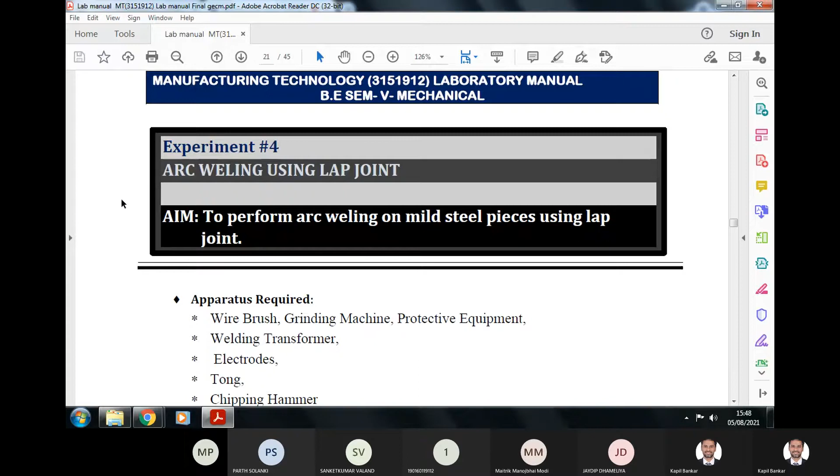A laboratory session of a manufacturing technology subject. This is our fourth laboratory, and today I'm going to discuss practical number 4, that is arc welding using lap joint. The aim of this practical is to perform arc welding on mild steel pieces using a lap joint.

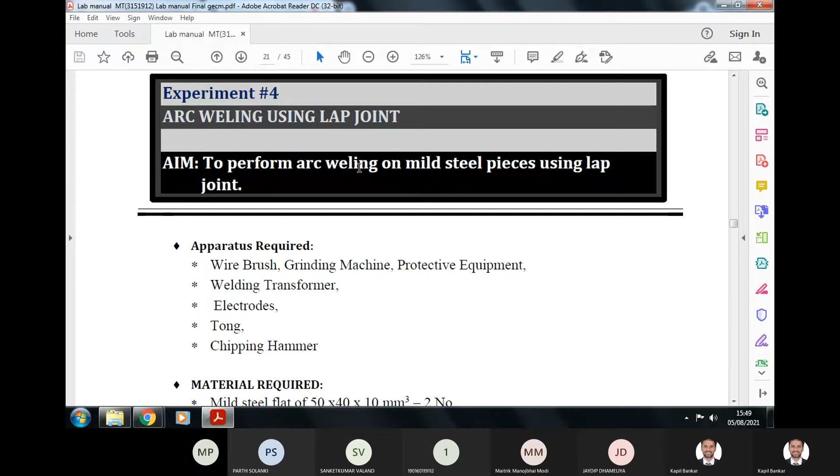You can do the welding with the help of any metal. Suppose it may be mild steel, and suppose there are two mild steel pieces, so you can join those two pieces using different joints. The joints may be a lap joint, a butt joint, or a perpendicular joint. With the help of any joint you can do your welding process. But our practical is to perform arc welding on mild steel pieces using the lap joint.

Here, the apparatus required for this practical are a wire brush for cleaning the welding, and a grinding machine to grind the workpiece or create grooves or some gaps. You can use the grinding machine to clean the workpiece after welding also. Then protective equipment such as hand gloves, safety glasses, shoes, etc.

Then the welding transformer. This welding transformer is known as your welding machine, arc welding machine. Then electrodes. You need electrodes for welding. An electrode is made up of a metal rod surrounded by coating. That is known as a welding electrode, or shortly, an electrode.

Then tong, that is a holding equipment. With the help of tongs, you can hold your workpiece, because after welding it gets heat from the welding process. Due to the workpiece having a higher temperature, you will not be able to hold it by hand. So tongs are required to hold the workpiece after welding.

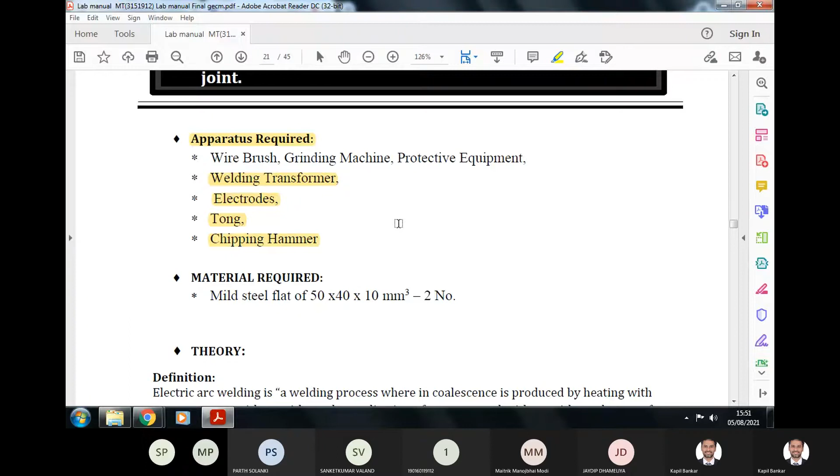The next is material required. Mild steel flat of 50 by 40 by 10 mm, 2 numbers. 2 numbers because we require the joint. If 2 pieces are there, then they can be joined by the welding process.

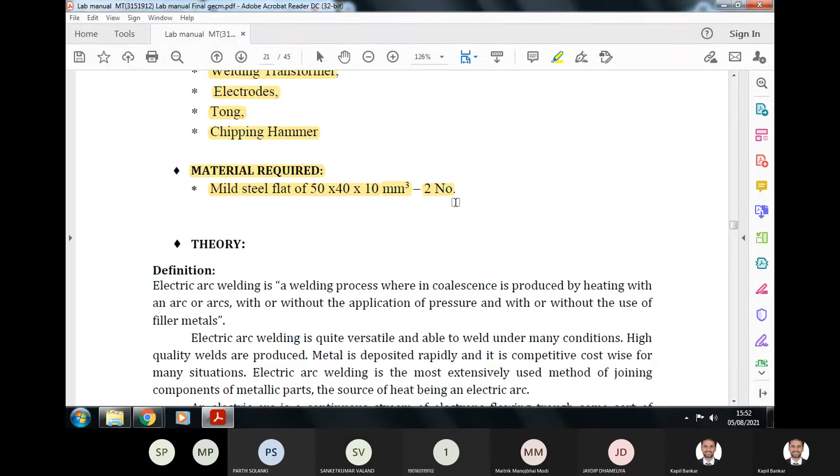Now, the theory associated with this process. Here we are going to weld with the arc welding process, electric arc welding. Electric arc welding is a welding process wherein coalescence, meaning heat, is produced by heating with an arc or arcs. So by applying this arc, the coalescence or heat is produced.

It is done with or without the application of pressure, and with or without the use of filler metal. So the welding process can be used with or without pressure, and with or without filler metal, you can join your metal. You can use filler metal for the welding, or not. In both cases, your welding will be done.

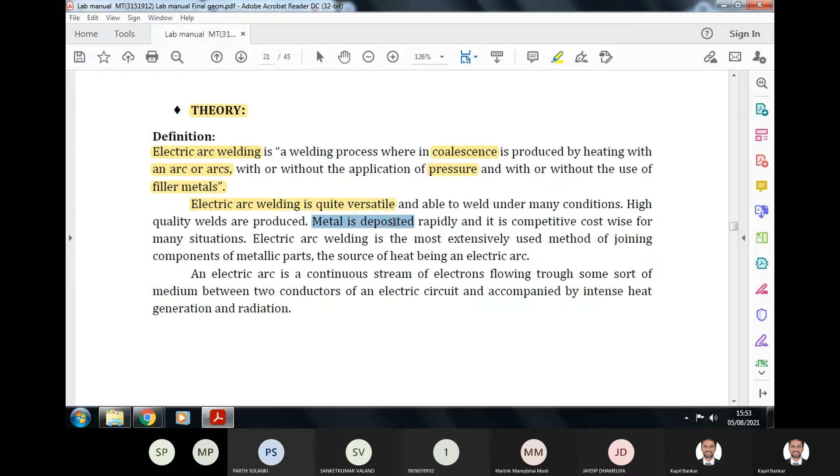Electric welding is quite versatile and able to weld under many conditions. High quality welds are produced. The metal is deposited rapidly and it is cost competitive for many situations. Electric arc welding is the most extensively used method of joining metallic parts, and the source of heating is the electric arc, which provides heat to your workpiece.

Once the arc is generated, heat is provided to the workpiece, it is heated up, and both pieces are joined when it cools down. An electric arc is a continuous stream of electrons flowing through some medium between two conductors of an electric circuit, accompanied by intense heat generation and radiation. This process is accomplished by completion of the electric arc circuit.

Once the electric circuit is completed, an arc is generated between the electrode and workpiece, and this arc provides heat to the workpiece. Due to this heat it melts, or not exactly melts, but the temperature of the metal increases, and then fusion occurs. So two different or two similar parts can be joined once it is cooled.

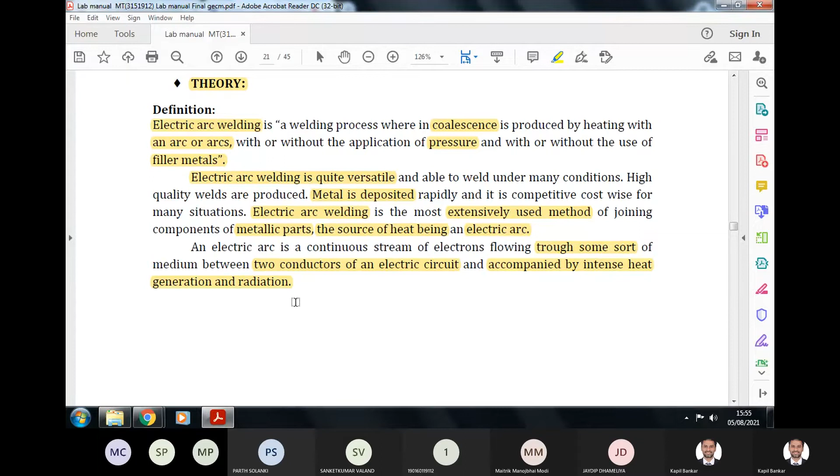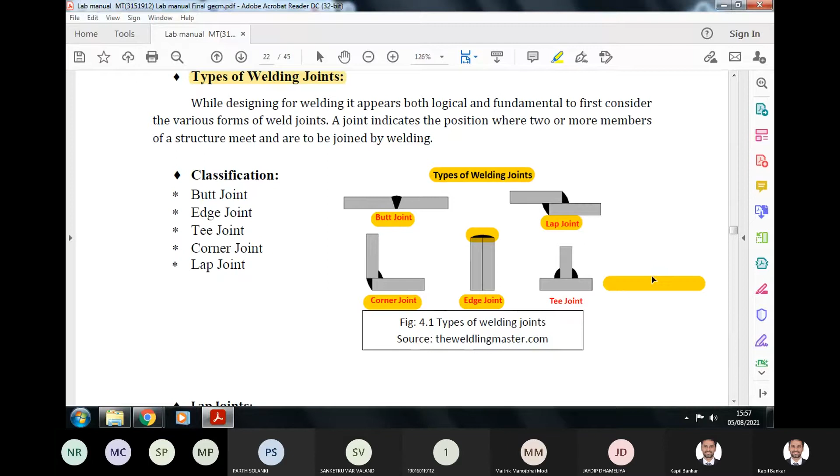Now, if you place the workpieces in a longitudinal manner and join them in this situation, that is known as edge joint. And in case of a perpendicular joint, one workpiece is horizontal and another workpiece is perpendicular on the center of the first. So that will make a T-like shape. So it is a T joint like this. On both sides of the T, you can weld the workpiece. So that is known as T joint.

So these are different types of welding joints. While designing for welding, it appears both logical and fundamental to first consider the various forms of weld joints. A joint indicates the positions where two or more members of a structure meet and are to be joined by welding. So by placing two workpieces in any of these manners, you can join them as per your requirement. You can classify these types as butt joint, edge joint, T-joint, corner joint, and lap joint. Clear?

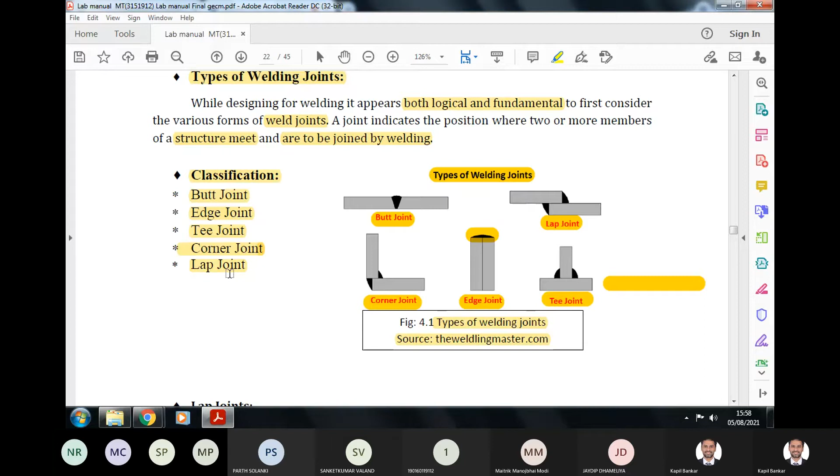So here, lap joint. In lap joint, as you know, two workpieces are placed one over another. In this situation, you can weld on one corner or both corners. If one corner is welded, it is known as single fillet lap joint. If both corners are welded, then it is a double fillet lap joint. So in this figure, you can see what happened.

Single fillet and double fillet joints as shown in the figure are used on all thicknesses. Double fillet joints are better compared to single fillet, because the strength of single fillet is lower than that of double fillet welding. Single fillet joints are not recommended on plates under bending, fatigue, or impact loading conditions. If these conditions are there, you must go for the double fillet lap joint.

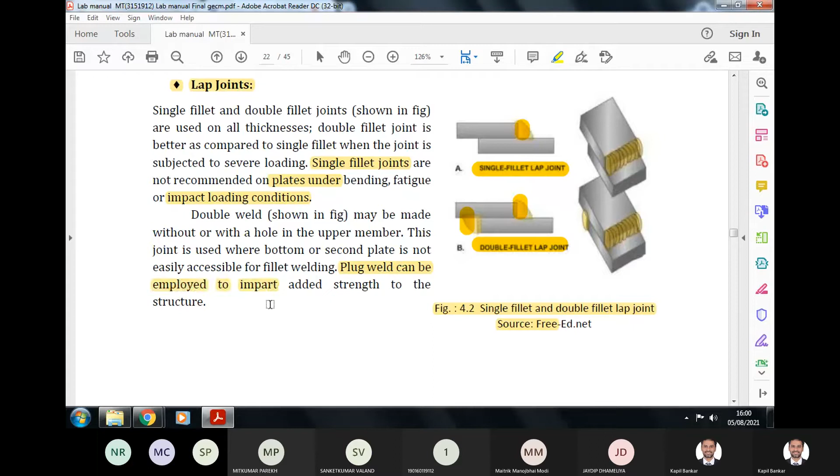Double fillet weld shown in this figure may be made with or without a hole in the upper member. This joint is used where the bottom or second plate is not easily accessible for fillet welding. So plug weld can be employed to impart added strength to the structure. If the joints are not getting enough strength, plug weld can be employed to give additional strength to the workpiece.

Now, the procedure to do this lap joint. First of all, the edge of the given material is prepared using a wire brush and finished through the grinding machine to remove the rust and scales present on the edge.

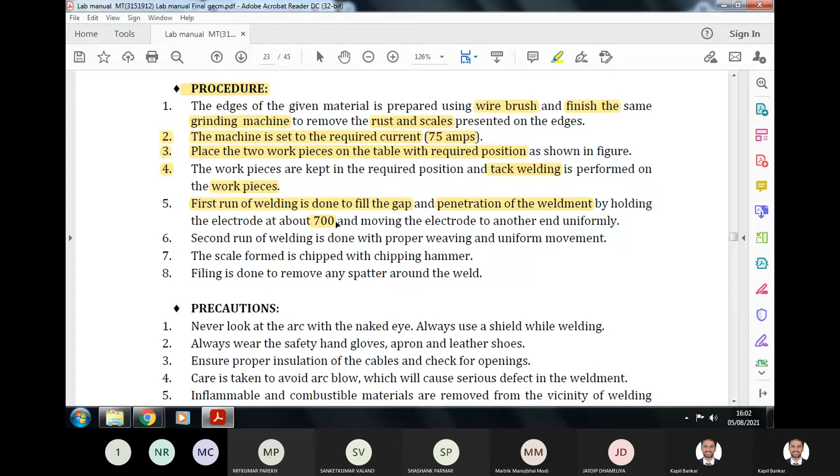Step number 4, the workpieces are kept in the required position and tack welding is performed on the workpiece. Hold the workpiece in the required position and then start your welding. In the first run, welding is done to fill the gap and for penetration of the weldment, by holding the electrode at about 70 degrees and moving the electrode to the other end uniformly. Second run of the welding is done with proper weaving and uniform movement.

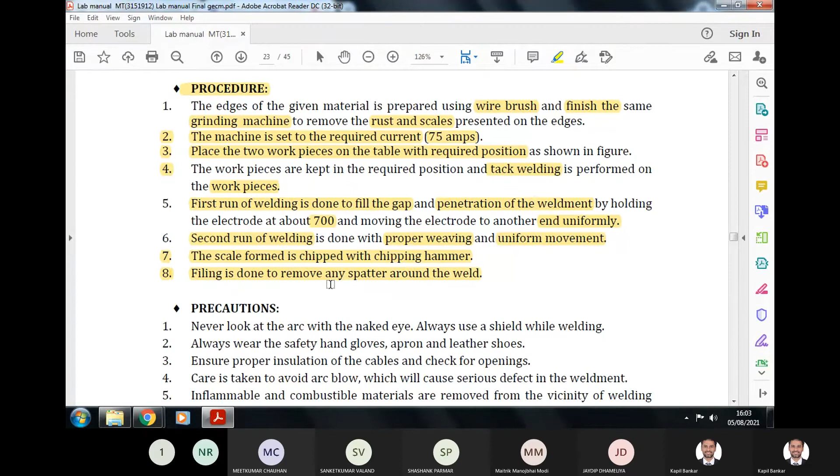And step number 8. Filing is done to remove any spatter around the weld. During welding there is always some spatter, so just remove that spatter if any.

And what type of precaution is required for welding? Never look at the arc with a naked eye. You cannot look at the arc directly, otherwise the arc will create a dangerous effect inside the eye. Always use the shield or a glass while welding.

Always wear safety hand gloves, apron, and leather shoes. Ensure the proper insulation of the cable and check for openings. Care is taken to avoid the arc blow, which will cause serious defects in the weldment.

Arc blow means the arc force will be higher. If the arc force is higher, the arc will be converted into arc blow, meaning very much heat is there. So avoid this type of arc blow during welding.

And precaution number 5. Inflammable and combustible materials are removed from the vicinity of welding operations.

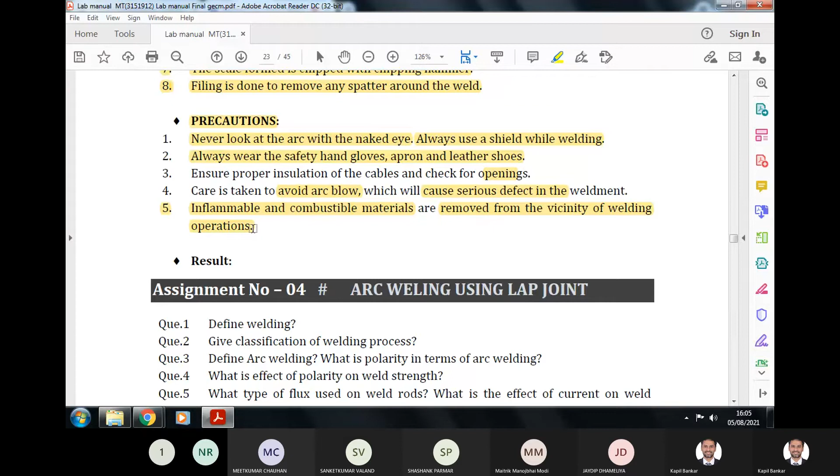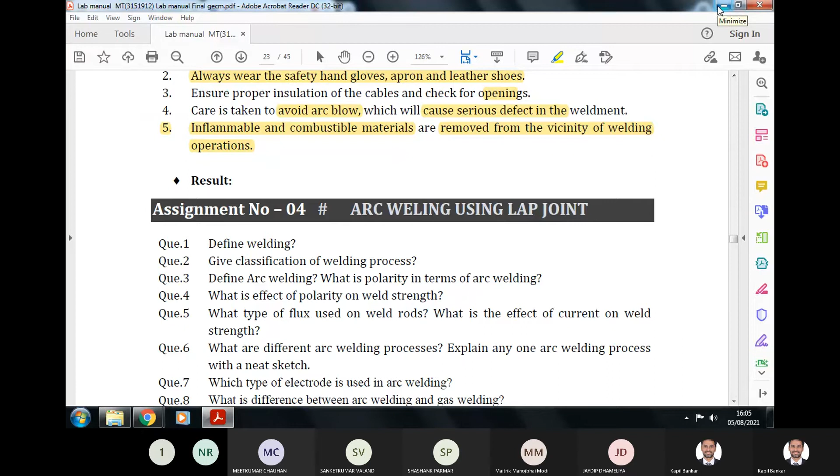Now I'm going to start the video of our practical. I performed this video in our laboratory, so just watch it.

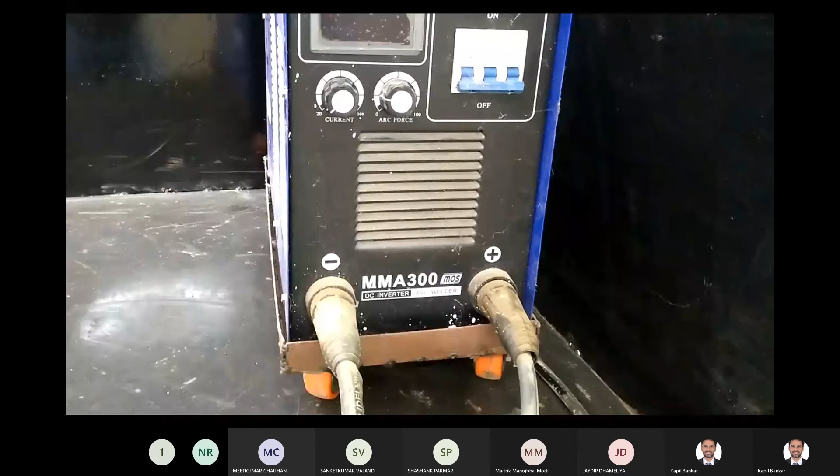So here, this is the arc welding machine, or the welding transformer, MMA 300. This is a DC inverter welding transformer, and here you can see the two wires, plus and minus. So here the welding power is there.

So switch on the power supply, and then switch on the power button of the welding transformer. I have just switched on the power. On the display you can see the welding current, 29. This is the first knob; if you rotate it, the welding current varies, and you can set it as per your required current.

I'm setting the welding current between 20 and 300 ampere, around 35 or 36 ampere. And the second knob is for the arc force, so it will provide some force to the arc.

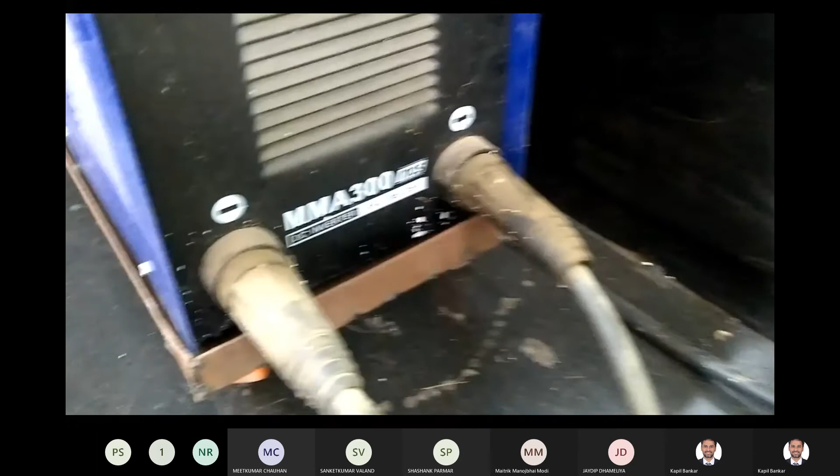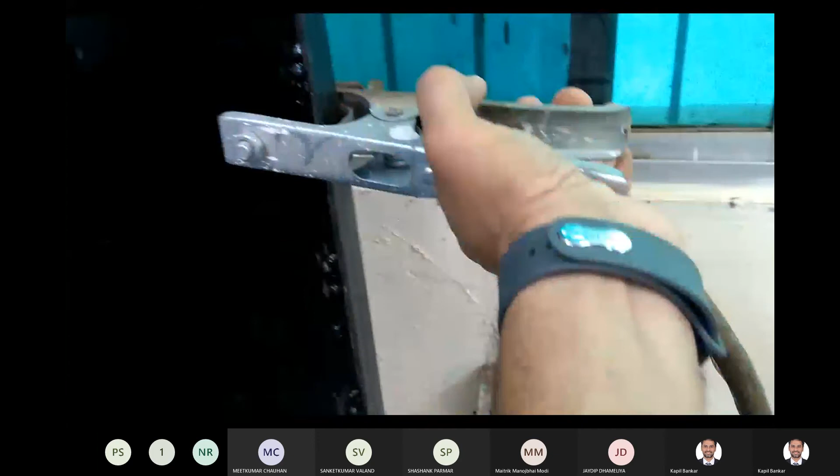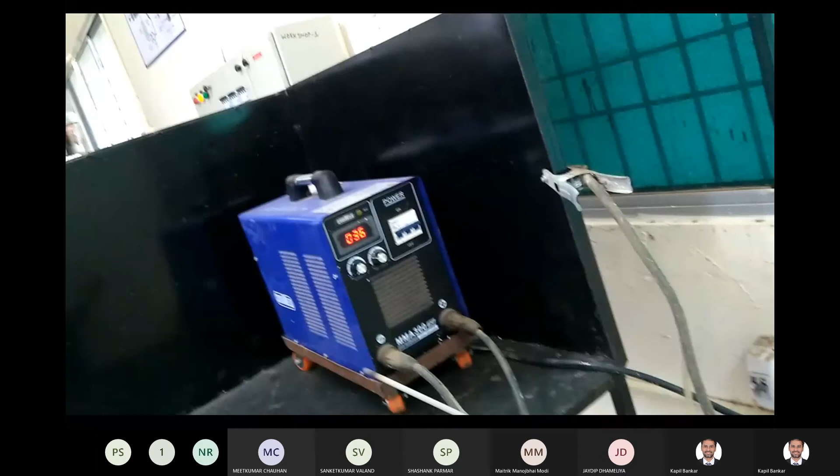Now here you can see the two cords, positive and negative. One cord is connected with the cable, so the circuit will be finished once I touch my electrode with the workpiece, and another cable is connected with this iron or metal table. Then my circuit is finished, the current passes through the circuit, and the electric arc is generated.

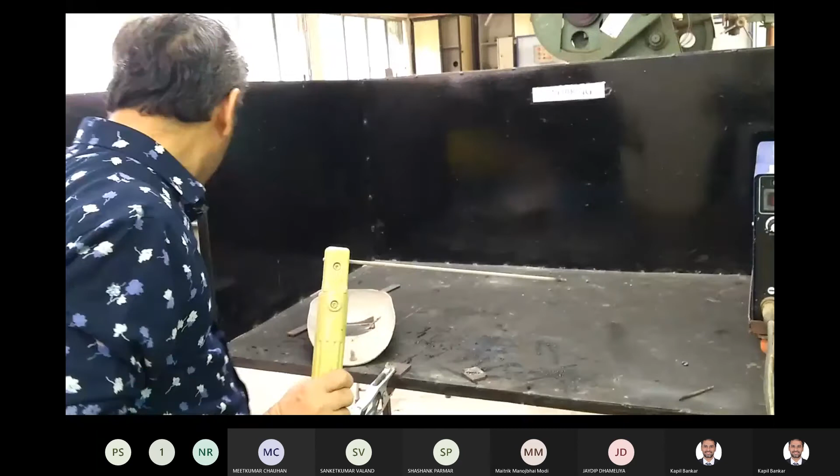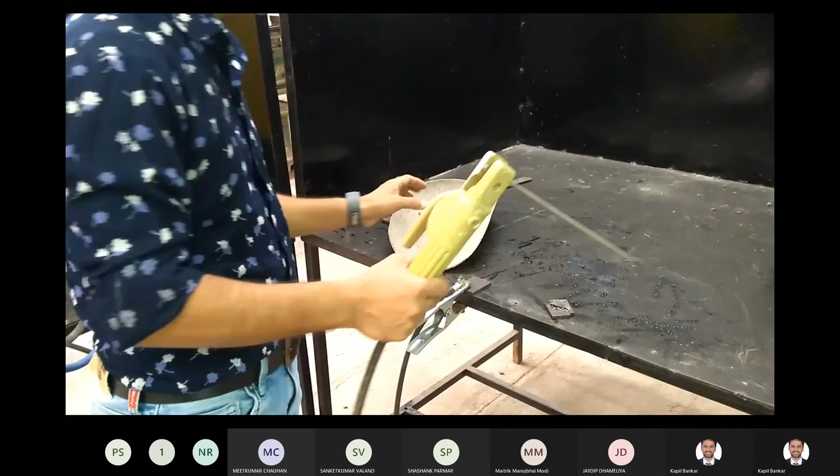See, this is the electrode, 6013 electrode. And this is the holder, and at the end of the holder the electrode is connected. This is our workpiece, and the workpiece is held on the table with a holder.

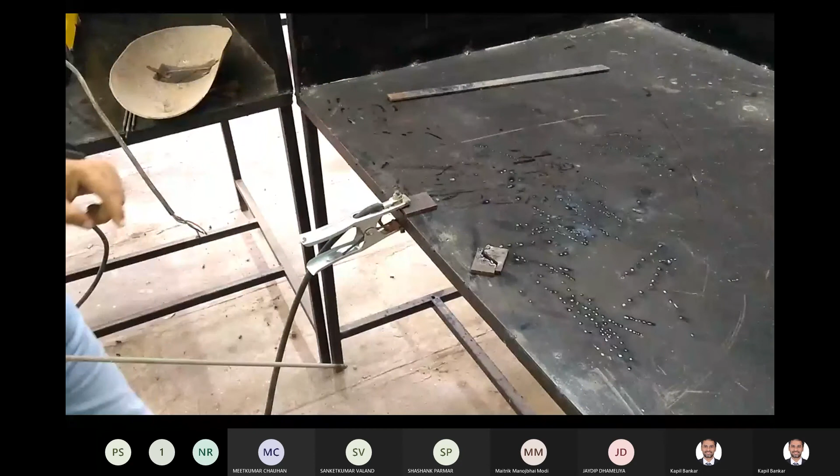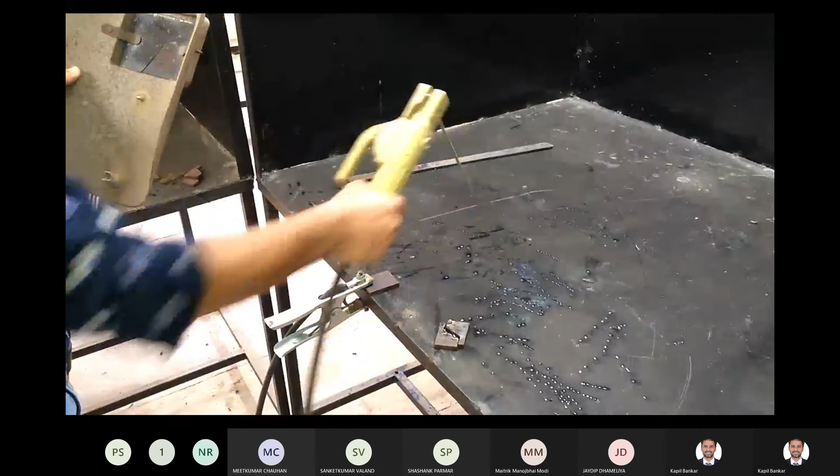Now I will strike my electrode on the table so that the arc is generated. See, this is the arc. First of all, you must create an arc by striking your electrode on the metal part. So the circuit is completed and the arc is generated.

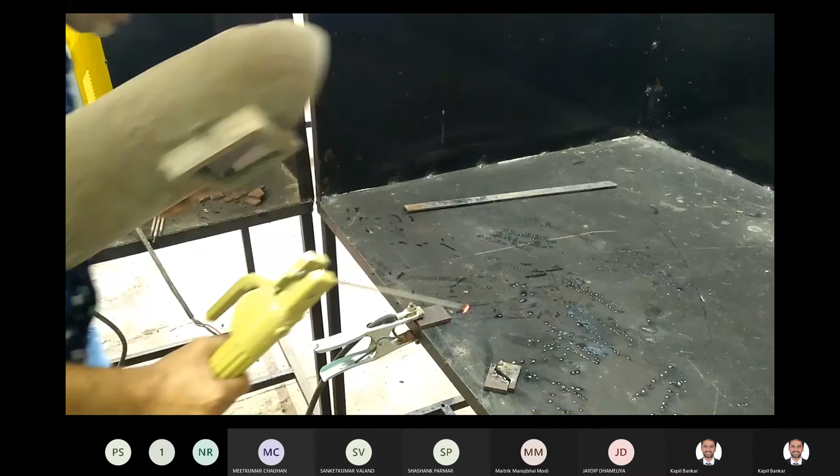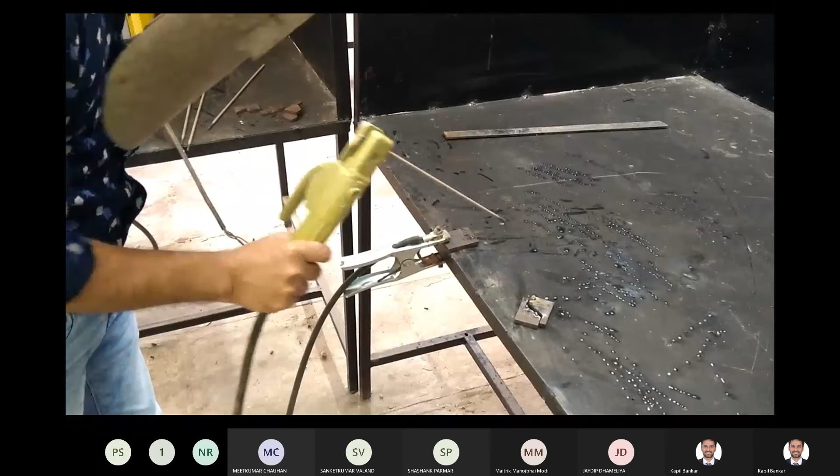Then place the electrode on the welding position, where welding is required, and do your welding. Now see the video. This is the arc generated, and with the help of this arc, welding will be performed on the workpiece.

This practical is performed in our workshop laboratory.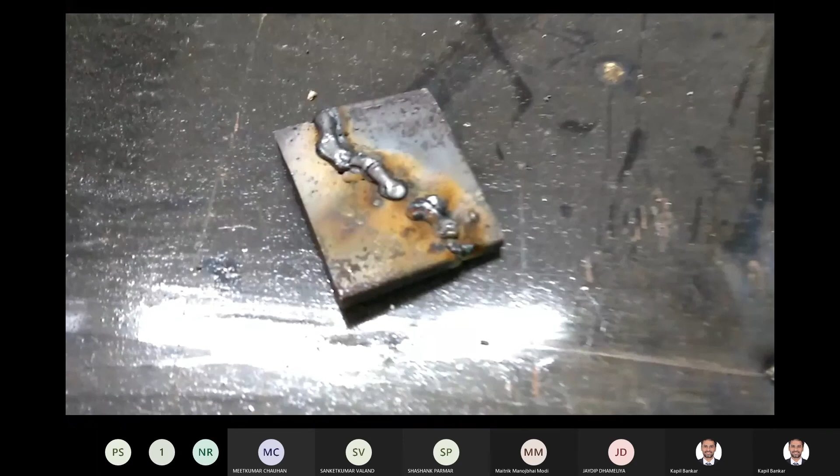Here I'm not going to take the lap joint; I have done this practical with a butt joint. Now after welding you will get this type of workpiece. From this video you can see the workpiece. This is the welding line. From one side it is welded and the other side is not welded.

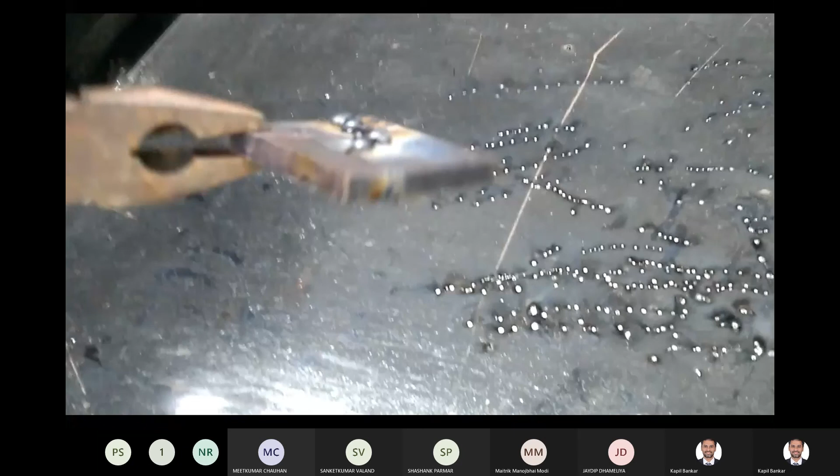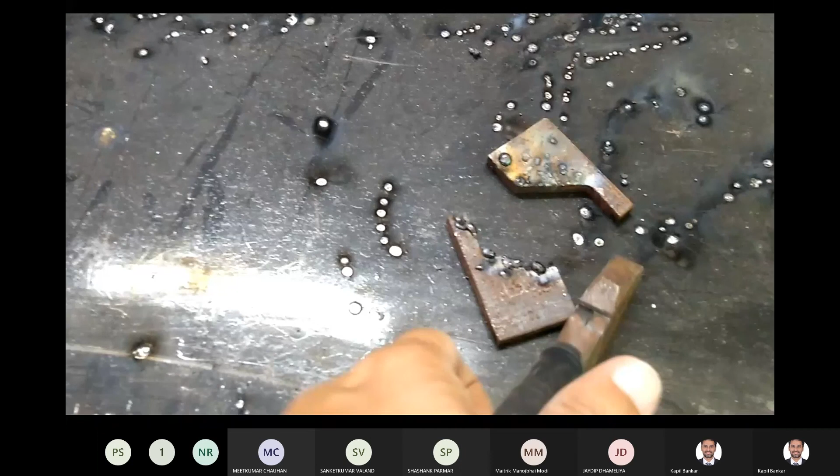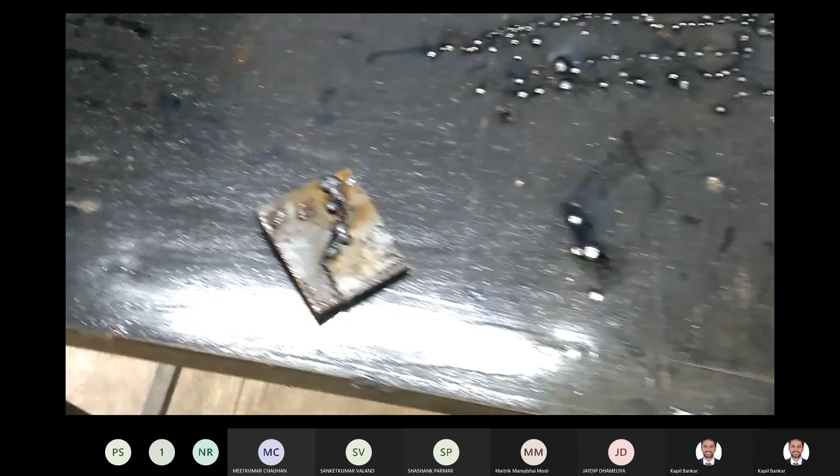Due to welding, the workpiece has a very high temperature, so I hold it with tongs. So it is welded. Before welding, there are two workpieces in this shape. Place the workpieces in the appropriate position like this and do your welding. After welding it will be like this. This is the product after welding.

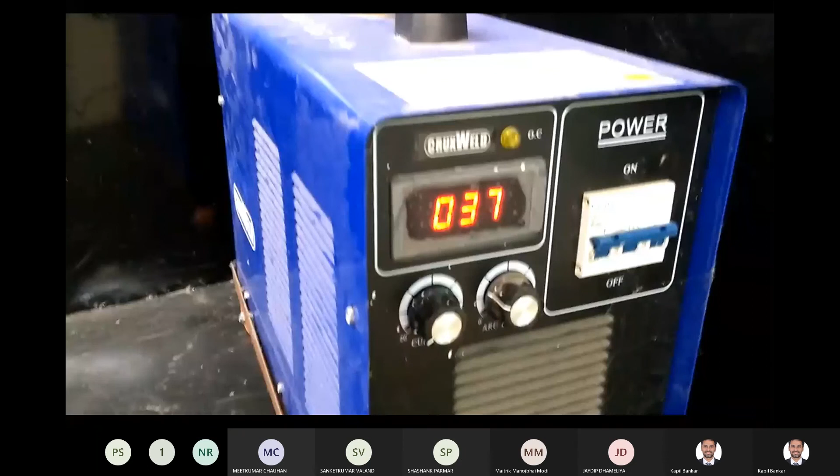This is our machine, the welding transformer. We can increase or decrease the welding current with the help of this knob. The second knob is for arc force. If you increase it, the arc force increases, and it will give deeper penetration to the workpiece.

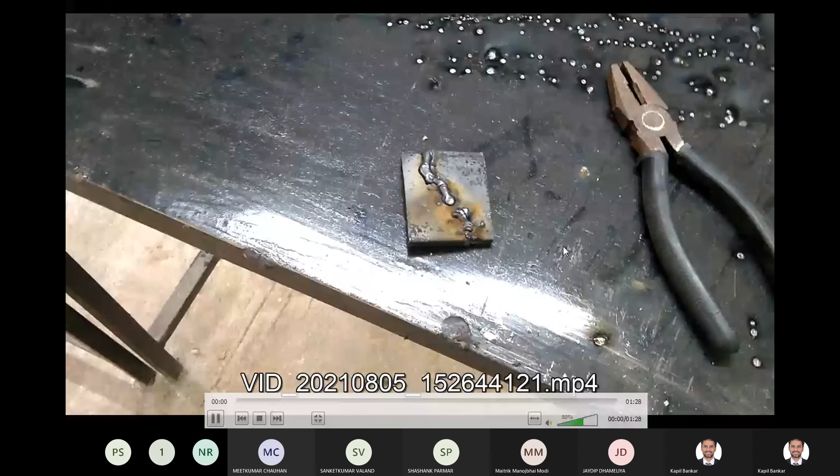So this is our practical number 4. If you have any doubt, then please tell me.